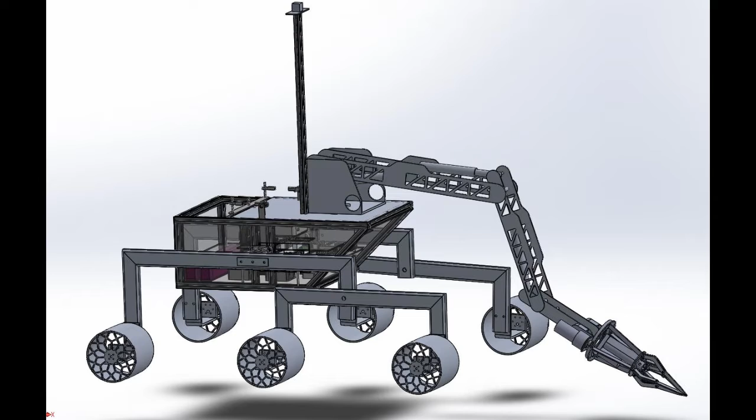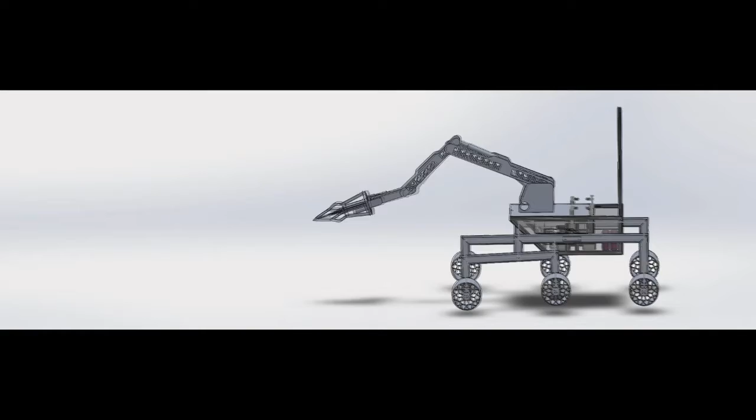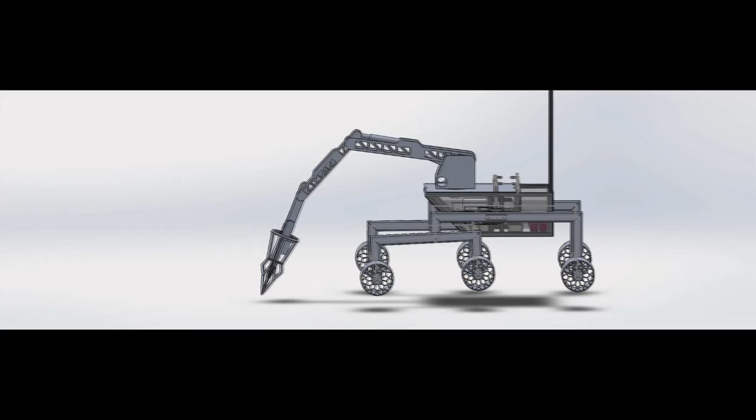The movement and frame team was tasked with ensuring that the rover's locomotion, suspension, and chassis are designed and constructed in a fashion that will not only meet, but also exceed the URC guidelines and requirements. To achieve this goal, some of the design choices made included selecting Bosch tubing and acrylic for the frame due to their low weight and high strength, as well as a rocker bogie suspension system due to its simplicity and wide range of motion. In addition, these design decisions were preferable since both Bosch tubing for the frame and aluminum for the suspension are readily available on campus.

The claw and science capability team was tasked with designing the arm, claw, sensor array, and sample storage containers. The structure of the arm is composed of its base, multiple arm segments, each consisting of adjacent aluminum sheets attached in between each other, 2 DC motors for full rotation at both the wrist and base, and 3 linear actuators in between for a full 5 degrees of movement.

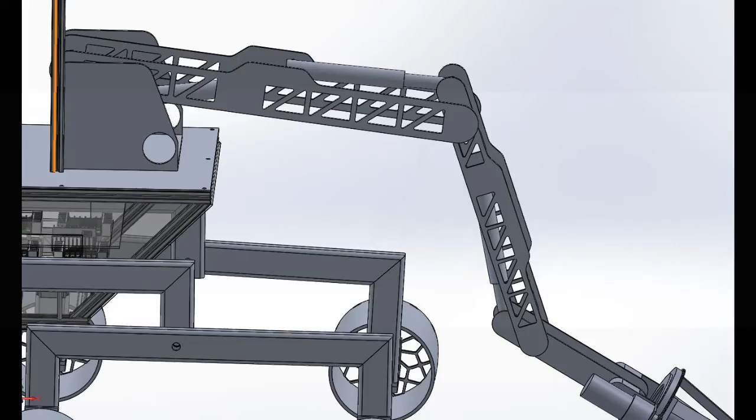For the claw, we decided to move forward with a 4-jaw design. We anticipate that such a design will provide better gripping power and contact than that of a 2 or 3-jaw design.

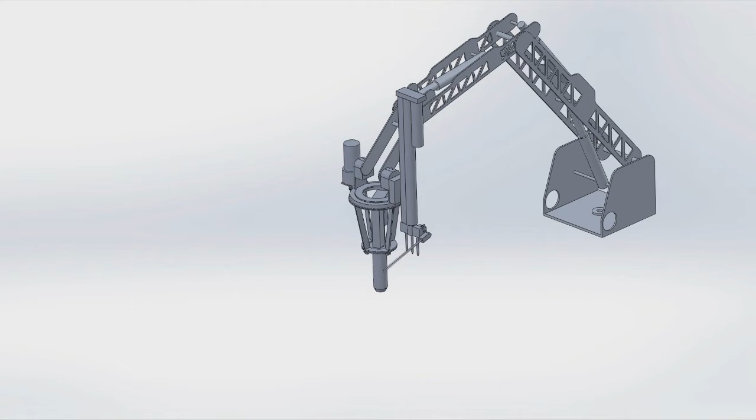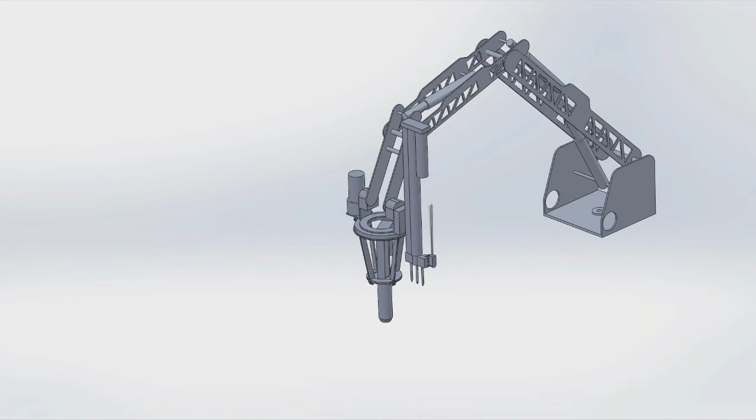On our sensor array, we have 2 probes. The 3-prong probe can measure the soil's relative humidity, electrical conductivity, and temperature down to 5 centimeters. Since the competition calls for a reading 10 centimeters below the surface, we made sure to include the side-mounted 15 centimeter temperature probe as well. To collect the sample, we plan to utilize a simple boring bit that will be both depressed and rotated into the soil, and then will be ejected through the use of an attached linear actuator.

We are designing an integrated system consisting of an Intel NUC centered around a network of Arduino microcontrollers that will run all of the peripheral equipment associated with the rover. An array of cameras situated on the front of the rover body, as well as lofted above on a boom, will assist in object detection and avoidance during the autonomous portion, and then provide multiple points of view during the driver-assisted missions. The NUC is meant to be the central computer of this system, handling all sensor input from each of the surrounding Arduinos and sending instructions back out to each of them in turn.

One of the Arduinos is dedicated to positioning and movement sensor input, outfitted with a GPS breakout board and LiDAR for accurate location data and advanced obstacle detection, while the rest of them are dedicated to the control and monitoring of the various motors situated around the rover through Sabertooth motor controllers.

So we have already designed our rover for an internet-based remote control and video streaming, and that system is tested and functioning. We have done preliminary testing of a second remote control system using 2.4 gigahertz radio control, and we'll implement the better of the 2 systems in the final design. We are using OpenCV and Python and have developed an object detection algorithm to help us complete the autonomous portion and to assist the pilot to identify key items to complete the competition.